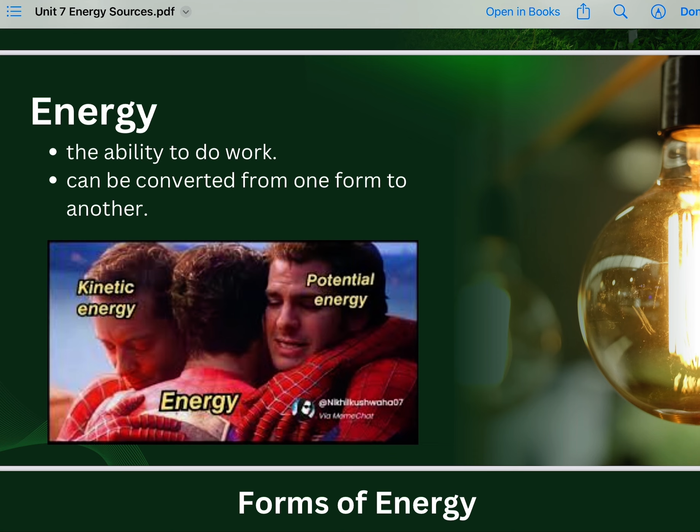That means kinetic energy, potential energy, as well as chemical energy are all just different forms of energy, including electrical energy.

So we have a lot of different forms of energy, and as I said earlier, energy can be transformed into another form.

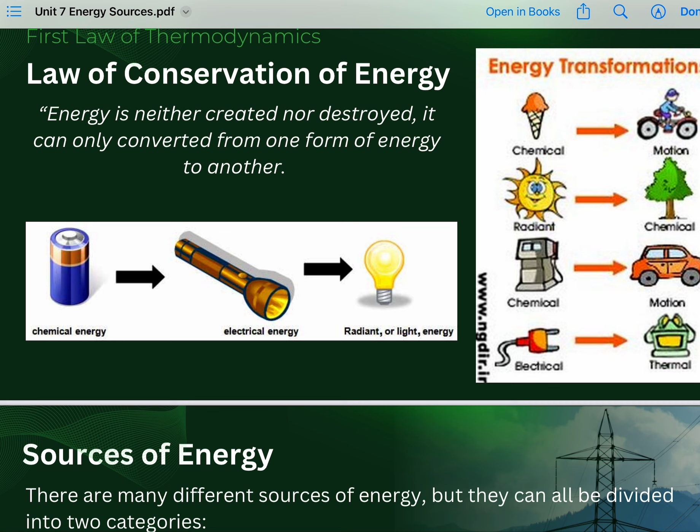So let's proceed with the sources of energy. There are many different sources of energy, but they can all be divided into two categories: renewable energy and non-renewable energy sources.

Primary energy sources take many forms, including nuclear energy, fossil energy such as oil, coal, and natural gas, and renewable sources like wind, solar, geothermal, and hydropower.

So primary sources of energy are being converted into electricity, a secondary energy source which flows through power lines and other transmission infrastructure to your home and businesses.

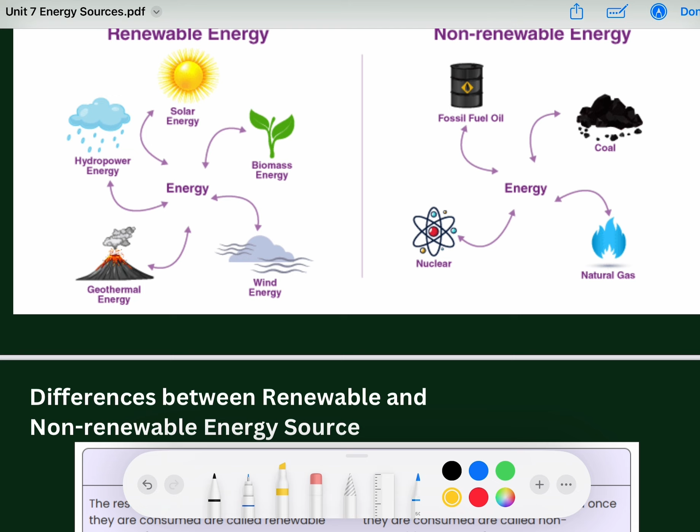Unlike solar energy, so long as andyan yung sun at may solar panel ka, continuous yung supply mo. Unlimited siya. Same thing with wind energy, dahil parating namang may hangin, parating magkaka-movement yung windmill, so parating mayroong wind energy. Same thing with geothermal energy, since hindi naman nawawala yung magma sa ilalim ng lupa, parating may source of geothermal energy. So, yun yung mga halimbawa natin ng renewable energy sources.

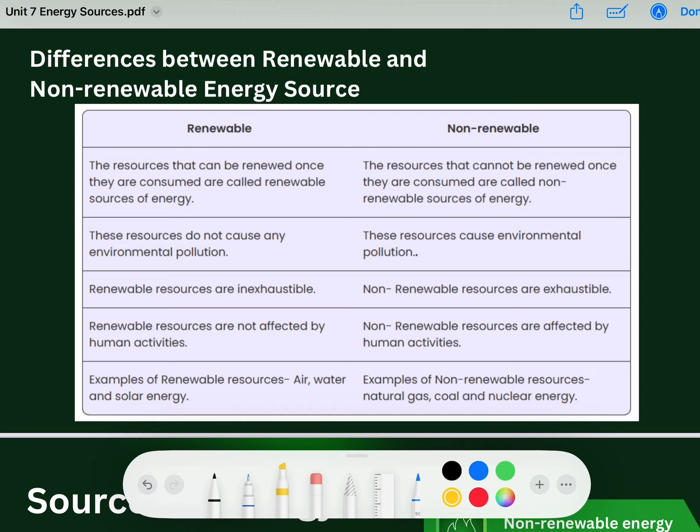So, just take note of these differences, yung description, kung ano yung pinagkaiba ng renewable and non-renewable energy sources. So let us proceed now, isa-isahin natin kung ano yung iba't ibang sources of energy na meron tayo globally.

So, energy comes from a variety of sources, both natural and human-made, and can be classified into renewable and non-renewable sources. Each source plays a significant role in meeting the energy needs of the world. Below are the primary types: non-renewable energy source, renewable energy source, at other emerging energy sources. Kasi with the technology that we are having now, class, marami nang nag-emerge na energy sources.

However, we cannot really categorize it yet as non-renewable or renewable. Kasi, yung idea ng hydrogen, it is somewhat a renewable energy source, however sobrang haba ng proseso para siya ay maging renewable. So there could be some instances na non-renewable siya. Pero yun, hindi siya classified into these two, kaya siya tinawag or nilagay as other emerging energy source, lalong-lalo na recent lang siya.

So umpisahan natin yung non-renewable energy sources. These sources are finite, ibig sabihin may katapusan lang yung sources natin nito, and will eventually be depleted. They have been formed over millions of years and cannot be replenished on a human time scale.

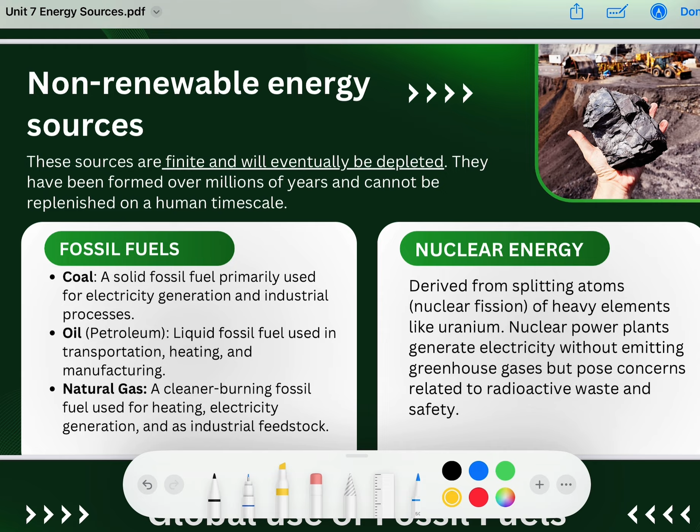Unang-una ang fossil fuels, under ng fossil fuels yung coal, oil, and natural gas. If you are familiar with how the continents were formed, kung babalikan natin yung concept ng continental drift theory, though it's just a theory, yun ay na-discover or nag-emerge millions of years ago. So yung presence ng coal, oil, and natural gas ay hindi pwedeng mabuo in a decade or in a century. It requires millions or thousands of years para magkaroon ulit ng coal sa mga lupa natin.

And these are harvested underground, ito yung isa sa mga minimina. This is because yung pagkakaroon ng coal, halimbawa na lang, happens kapag nagkakaroon din ng layering sa lupa natin or sa rocks. So, and again, hindi siya pwedeng mangyari lang sa loob ng 10-year span o kaya naman 100 years. Kailangan sobrang tagal niya para magkaroon tayo nitong mga fossil fuels natin.

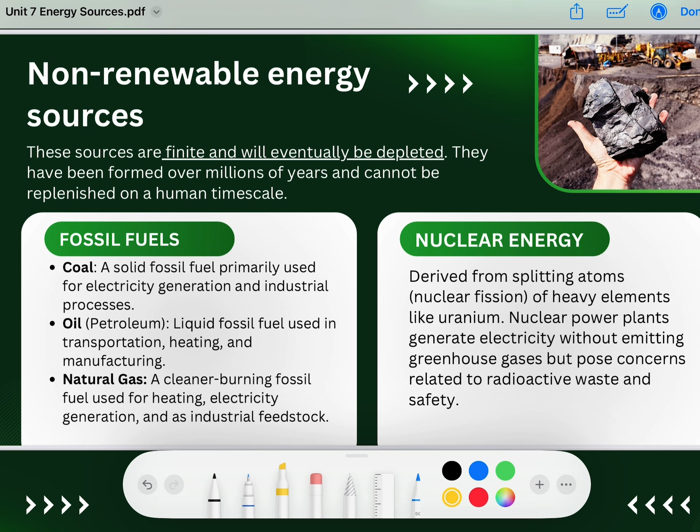So next, isa-isahin muna natin yung coal, oil, and natural gas. Yung coal, isa sa primary used sa electricity generation at ginagamit siya sa industrial processes. Next ang oil or petroleum, these are liquid fossil fuel used in transportation, heating, and manufacturing, nakukuha din ito underground. And natural gas, a cleaner burning fossil fuel used for heating, electricity generation, and as industrial feedstock.

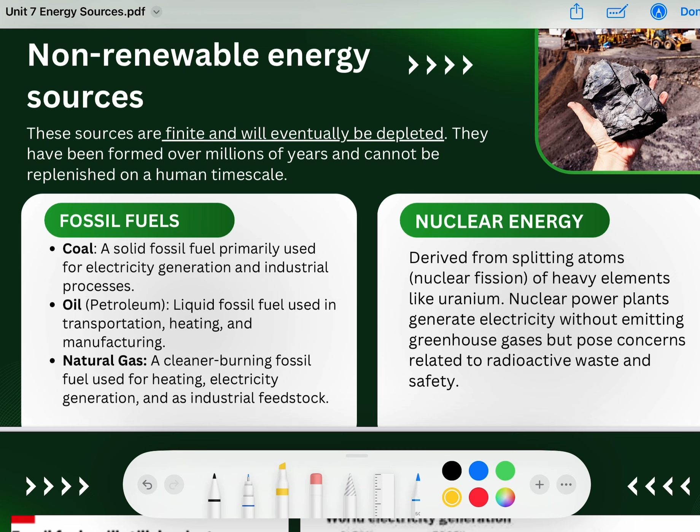Next is nuclear energy, ito naman ay nakukuha due to nuclear fission, by the splitting of atoms of heavy elements like uranium. Maganda itong energy source, however delikado lang siya kasi mayroong radiation na byproduct which can be harmful sa mga nakatira sa paligid. At the same time, delikado siya dahil may potential siya na mag-cause ng explosion, kasi may chemical reaction. Though meron naman chemical reaction sa ibang ways of harvesting energy, pero ito yung pinaka-main process of harvesting energy is chemical reaction. Kaya hindi na siya advisable, or kung walang proper maintenance, proper plan for building a nuclear power plant, hindi na talaga siya pinapayagan.

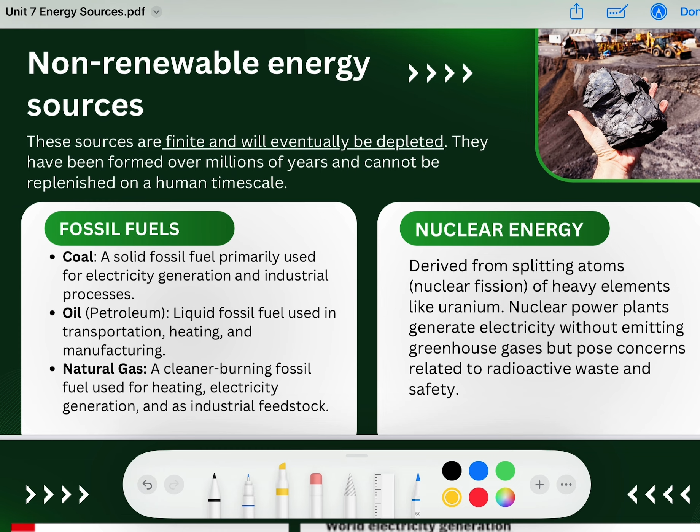Next, punta na tayo sa global use of fossil fuels. Yung fossil fuels actually ay main source natin of energy. As you can see, out of the different types of fossil fuels, yung petroleum products yung pinakamataas nating consumption, followed by coal and natural gas. Konting-konti lang yung renewables and nuclear. Imagine yung renewables natin dito ay 14.1% lamang, pero yung renewable energy sources natin, parati namang andyan.

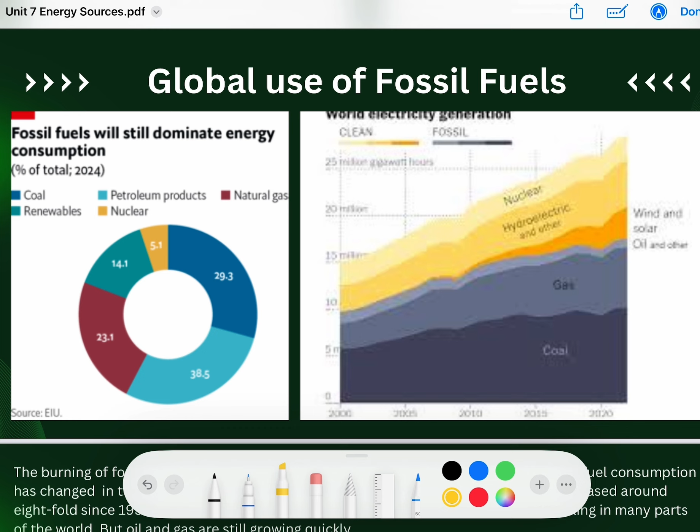So later, pag-uusapan natin bakit ba hindi tayo nag-shift into renewables, what hinders the industry to shift into renewable energy and patuloy na harvest ng energy through non-renewable. At yung world electricity generation naman ay highly dependent on gas and coal. Kung makikita ninyo, itong nasa lower part na ito.

At ang hydroelectric lang bilang renewable energy source ay konting porsyento lang. Mas madami pa rin yung fossil fuels compared sa renewable or sa clean energy harvesting.

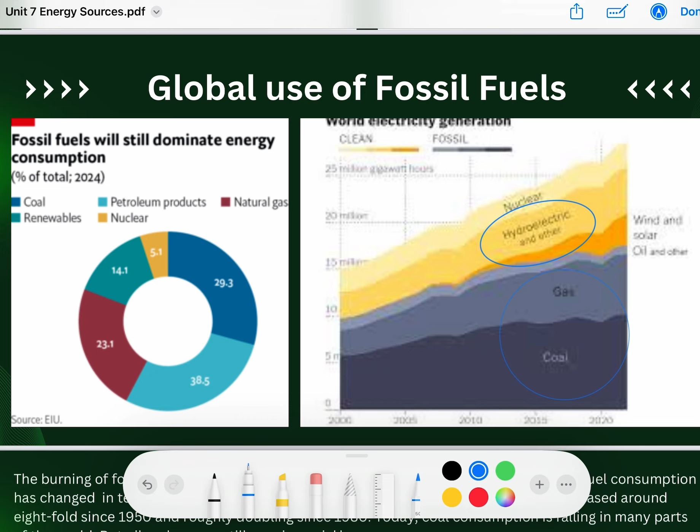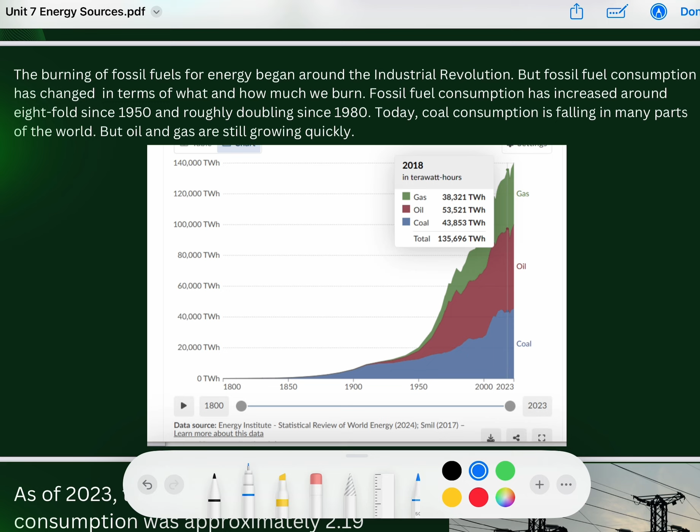Another graph shows the burning of fossil fuels for energy began around the Industrial Revolution. Take note of that. Yung fossil fuels kasi, sobrang laki ng part niya when it comes to transportation, infrastructure. That is why nung nagkaroon ng Industrial Revolution, naging mataas din yung demand for gas, oil, and coal.

Kasi nga, sila yung tatlo sa mga pinakagamit na energy during the Industrial Revolution. But fossil fuels consumption has changed in terms of what and how much we burn. So fossil fuel consumption has increased around 8-fold since 1950 and roughly doubling since 1980. Ano na lang kaya yung fossil fuel consumption natin at presently, lalong-lalo na mas madami na yung demand for transportation, infrastructure, and industry.

Kumbaga hindi man natin totally, kasi yung fossil fuel consumption, it includes burning. At kapag merong burning o merong combustion, merong carbon dioxide na napoproduce. Kaya siya harmful sa ating environment. So regardless of that need, wala kasing proper regulation on the use of fossil fuels, kaya nagiging harmful siya.

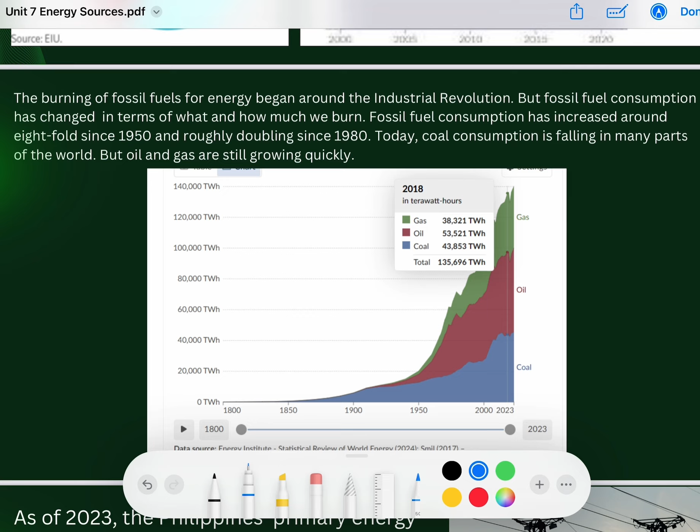Pero kailangan naman talaga natin yung paggamit ng fossil fuel, lalong-lalo na yun yung madaling paraan ng pag-harvest ng energy compared sa mga renewable energy sources. Pag-uusapan pa natin yan later sa mga susunod nating slides.

So punta naman tayo sa context ng energy consumption sa Philippines. As of 2023, the Philippines' primary energy consumption was approximately 2.19 exajoules with fossil fuels, mainly oil and coal, constituting a significant portion. Oil consumption was about 0.93 exajoules and coal consumption was around 0.88 exajoules in terms of electricity generation.

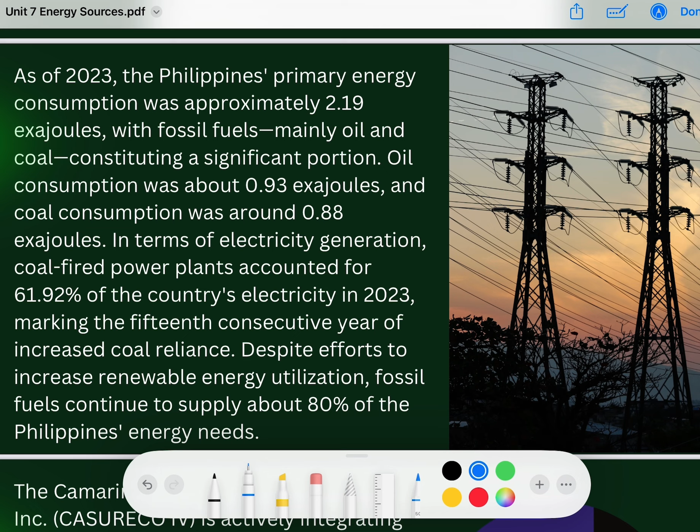Coal-fired power plants accounted for 61.92% of the country's electricity in 2023, marking the 15th consecutive year of increased coal reliance. Despite efforts to increase renewable energy utilization, fossil fuels continue to supply about 80% of the Philippines' energy needs.

So dito, yung CASURECO IV, this is somewhere in Partido area. Camarines Sur 4 Electric Cooperative Incorporated, or CASURECO IV, is actively integrating renewable energy sources into its power supply. The cooperative has entered into renewable energy supply agreements, particularly focusing on hydroelectric power to diversify its energy mix by harnessing renewable energy sources like hydro and solar power.

CASURECO IV aims to decrease its reliance on fossil fuels, thereby enhancing energy security and contributing to environmental sustainability. So bago ko i-discuss class yung renewable energy sources, pag-usapan na natin bakit hindi tayo nag-shift globally sa renewable energy and tinatangkilik pa rin natin yung non-renewable energy harvesting.

Yung non-renewable energy harvesting kasi class ay mas madali at mas mura. Mas madali yung pag-harvest ng energy, at the same time mas mura siya compared kung mag-shift tayo into renewable energy source o renewable energy harvesting. Ang daming proseso, ang daming kailangang gawin.

Para lang magsimula ang solar power plant, hydrothermal power plant, o geothermal power plant. At siguro kung i-compare natin yung nakukuha nating energy, mas madami yung convert na electrical energy ng mga non-renewable compared sa renewable. So kumbaga, since ito yung mas madali, dun tayo. Parang ganun yung naging mindset.

Also, if naisip ko lang, since yung Pilipinas ay isang archipelago na mapalibutan tayo ng tubig, pwede din tayong mag-shift sa... balikan natin lang yung forms of energy. Wave energy, yung pag-harvest ng energy through waves. So, since ang Pilipinas ay isang archipelago na palibutan tayo ng tubig, if sana yung na-maximize natin yung mga natural resources natin, then we can definitely shift into renewable energy.

However, class, talagang magastos, madaming prosesong kailangan pagdaanan para lang makasimula ng mga ganitong renewable power plants. So, isa-isahin na natin class yung mga renewable energy sources na meron tayo or discovered na renewable energy sources na pwede nating gawin.

So first, we have the solar energy, which is definitely coming from the sunlight. This is through harnessing energy using photovoltaic or PV panels or solar thermal collectors. Next is wind energy, generated using wind turbines. Hydropower, generated by the movement of water through dams or rivers.

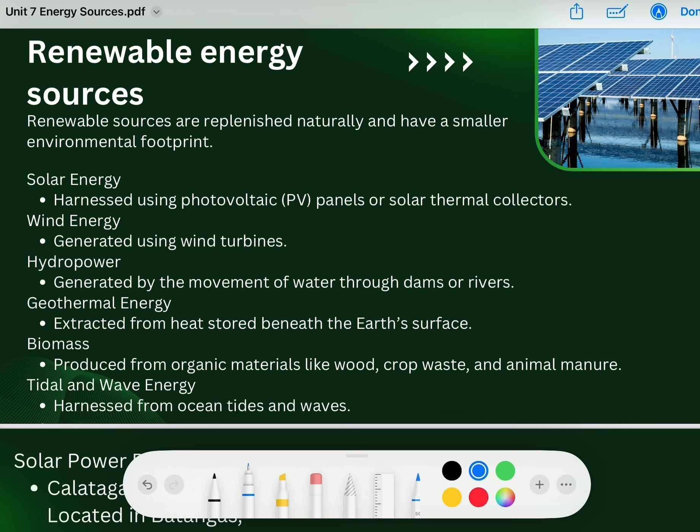Geothermal energy, extracted from heat stored beneath the Earth's surface. Biomass, produced from organic materials like wood, crop waste, and animal manure. And tidal and wave energy, harnessed from ocean, tides, and waves.

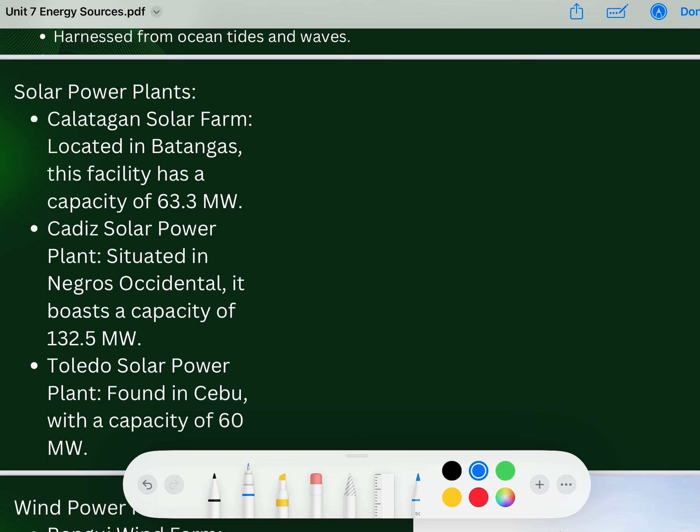So, meron ako dito class pictures nung mga nakuha kong solar power plants na meron tayo sa Pilipinas. However, hindi sila nag-load, so I will just send the link, yung reference ko nito, kung saan or ano yung itsura ng mga solar power plants dito sa Pilipinas. So, meron tayo sa Calatagan, Batangas, Negros Occidental, and Cebu, Toledo, Cebu.

Dito sa Bicol, meron tayo sa under Casureco sa Calabanga, Camarines Sur, na I think kakatayo lang last year. Natapos lang yung pagtayo sa kanya last year, pero hindi ko alam kung operating na siya. So meron doong solar power plant na tinayo to aid the Casureco in providing electricity, I think, for residential use siya. So, magandang initiative na yun.

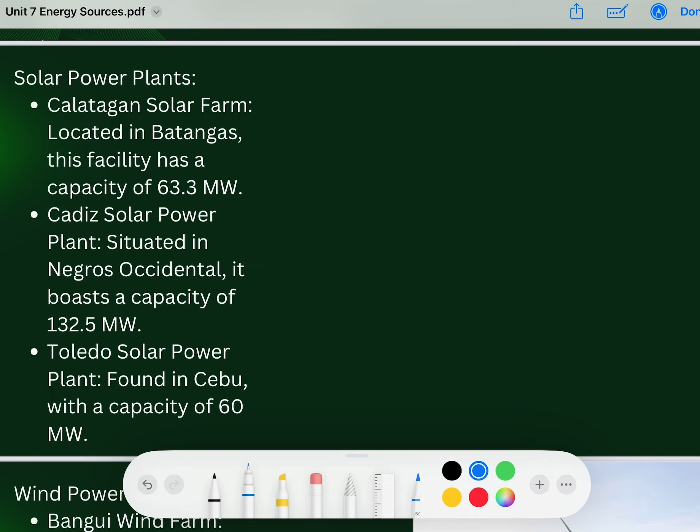Also, wind power plant. So, alam naman natin, Ilocos Norte, yung pinaka kilalang mga wind power plants. Halos lahat, Ilocos Norte. Iba-iba lang yung mga wind farm na to. Meron tayong Bangui Wind Farm, Burgos Wind Farm, and Caparispisan Wind Farm, all situated in Ilocos Norte.

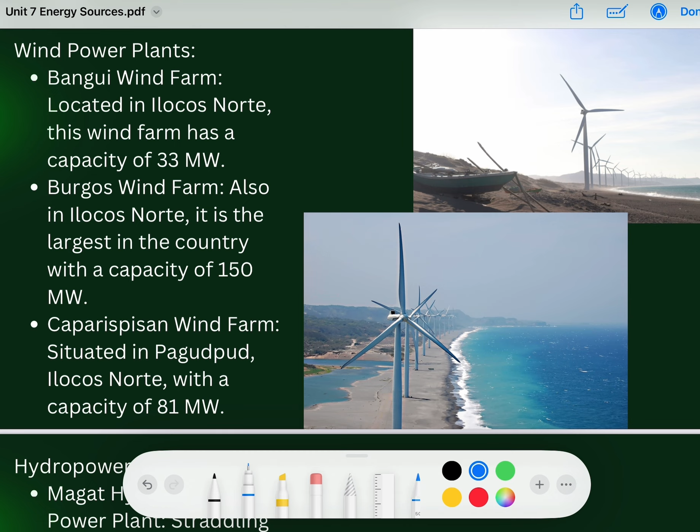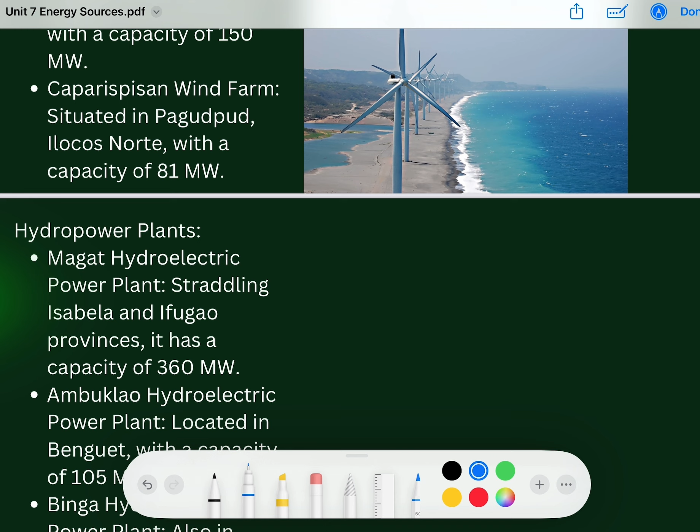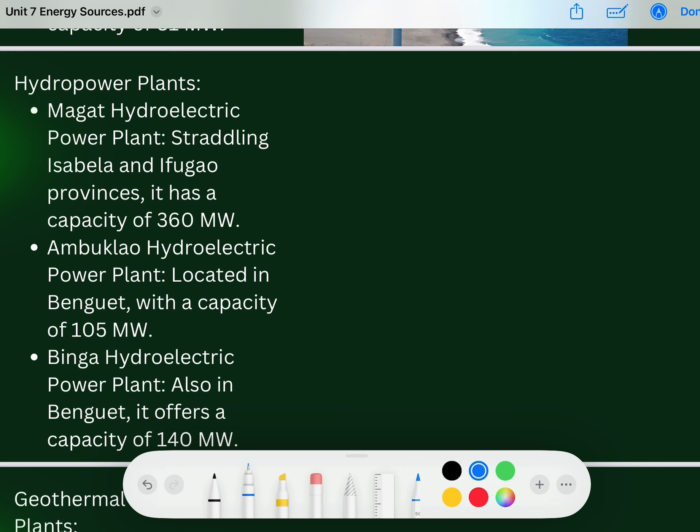Next is hydropower plants. We have one in Ifugao and Isabela provinces, the Magat Hydroelectric Power Plant, Benguet, Ambuklao Hydroelectric Power Plant, and also in Benguet, the Binga Hydroelectric Power Plant.

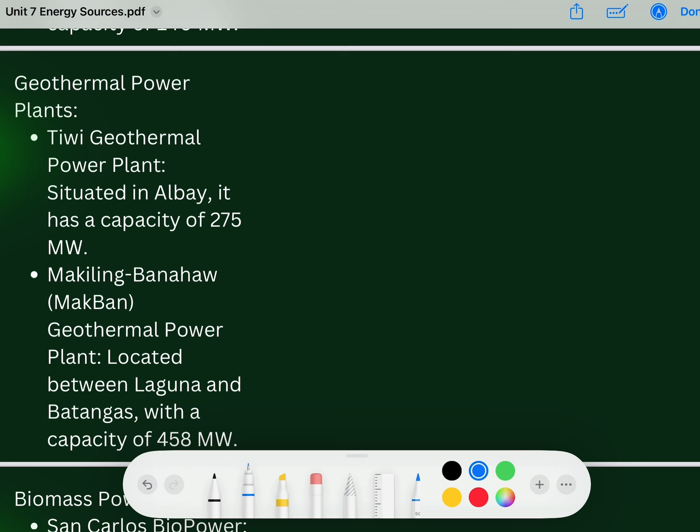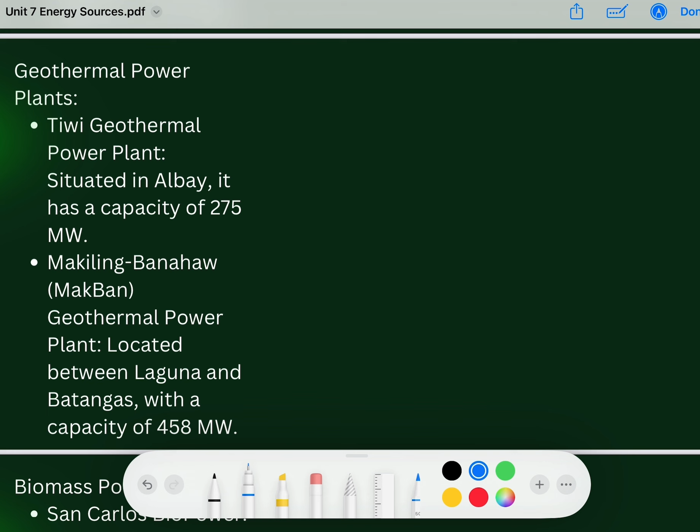Next is the geothermal power plants. Meron tayo sa Tiwi, Albay, the Tiwi Geothermal Power Plant, and in Laguna and Batangas, the Makiling Banahaw Power Plant. So, as you can see, yung Tiwi, of course, definitely malapit ito sa Mayon, yung power plant na to. And yung Mount Banahaw and Makiling, the MakBan Geothermal Power Plant. Located din siya sa mga bundok.

So, next, the biomass power plants. Yung biomass power plants pala, class, gumagamit siya ng organic material, such as yung mga dumi ng hayop, yung mga food waste. Yun yung ginagamit sa biomass power plants. Ginagamit nila yung organic matter to produce electricity.

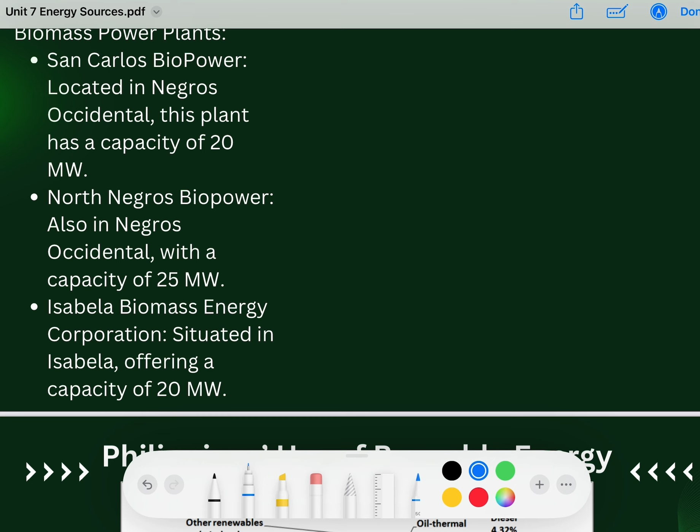Meron tayo sa Negros Occidental, the San Carlos Biopower. Pero kung makikita ninyo, sobrang liit ng na-generate niyang electricity, 20 to 25 megawatts lamang. I think this is just enough to power an establishment, but I don't think it can, or enough siya to power an entire community, a residential area. So, we have 2 in Negros Occidental and 1 in Isabela.

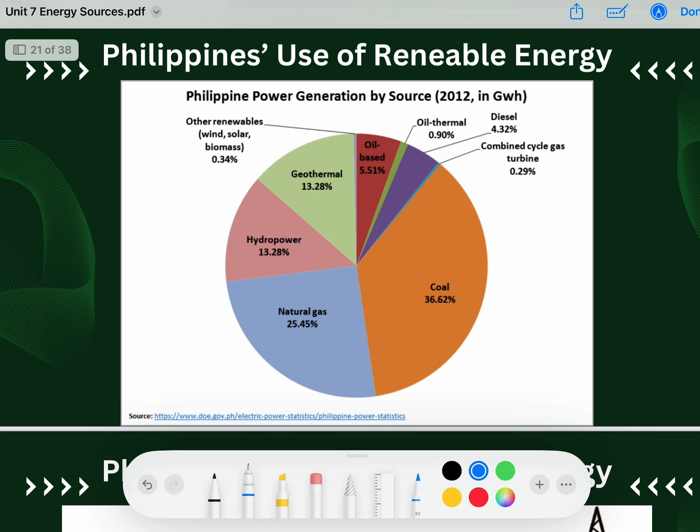So, this is the energy usage of the Philippines in general, not just renewable energy. What is the percentage of our energy sources or consumption? Coal is the largest energy source at 36.62%, followed by natural gas at 25.45%. If you analyze this pie chart, almost two-thirds is non-renewable, and only one-third, such as geothermal, hydropower, and other renewables, is renewable energy source. So we are still highly dependent on non-renewable energy despite having huge potential for renewable energy since we have a lot of natural resources; we still haven't maximized it.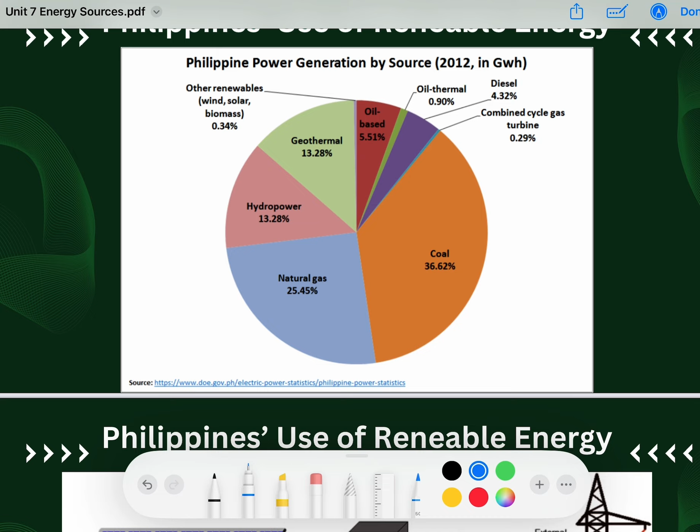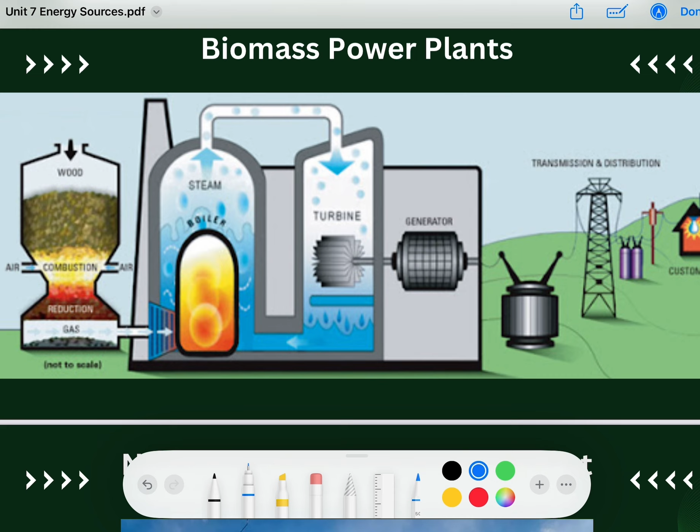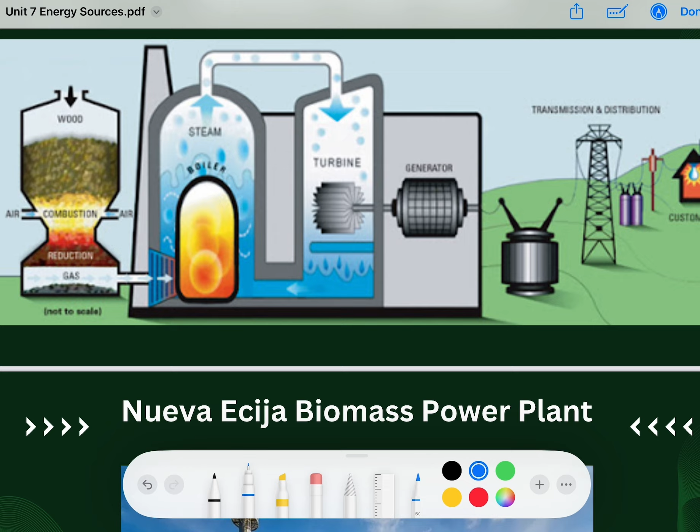So let's go to the third topic, emerging and alternative energy sources. This focuses on clean energy. We have hydrogen energy, used as a clean fuel when extracted via electrolysis using renewable energy. This is the method of producing hydrogen gas, which can be done through biomass, even electrolysis. So it can produce hydrogen gas which can be a clean fuel.

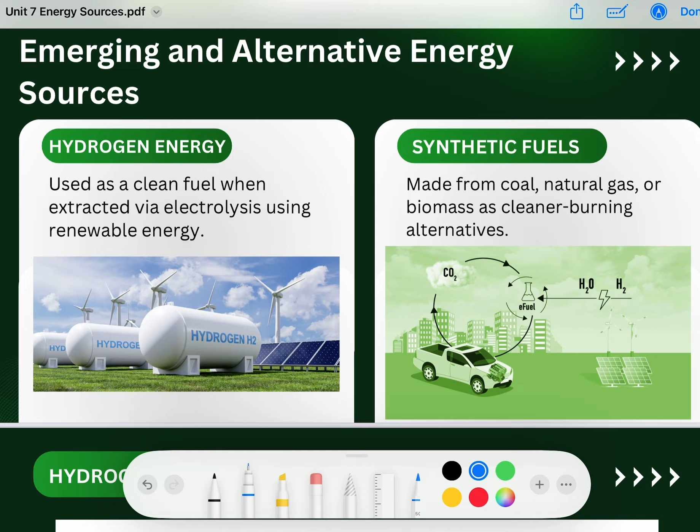Also, synthetic fuels. These are made from coal, natural gas, or biomass, but no combustion takes place. This is also electrolysis. Instead of burning natural gas or coal, which produces carbon dioxide harmful to our environment, we do electrolysis instead so there's no byproduct of carbon dioxide. So, still, it's clean energy. That's hydrogen energy.

So what are the benefits of renewable energy sources? Of course, many. First, environmental benefits. Greenhouse gas emissions will be reduced. Toxic gases in our atmosphere will be reduced. Air pollution will also be reduced since there will be fewer pollutants destroying our air quality. And it can preserve ecosystems since it will be a healthier option for our environment.

Next is economic advantages. Since there are many processes in creating or harvesting renewable energy, it will produce jobs. It can provide jobs for people for installation, maintenance, manufacturing, or research. Also, cost savings. The investment is really large; however, if the quality is good and it is well-maintained and assured to be long-term in use, you can still save money. You just really need to invest a lot upfront.

Next is localized energy production. Decentralized systems reduce transmission losses and bring energy to remote areas, fostering regional development. For example, those in coastal areas or isolated islands won't suffer from having no power lines or electricity. If there's a solar power plant in the area, or a wave or tidal energy power plant, they will still have access to electricity.

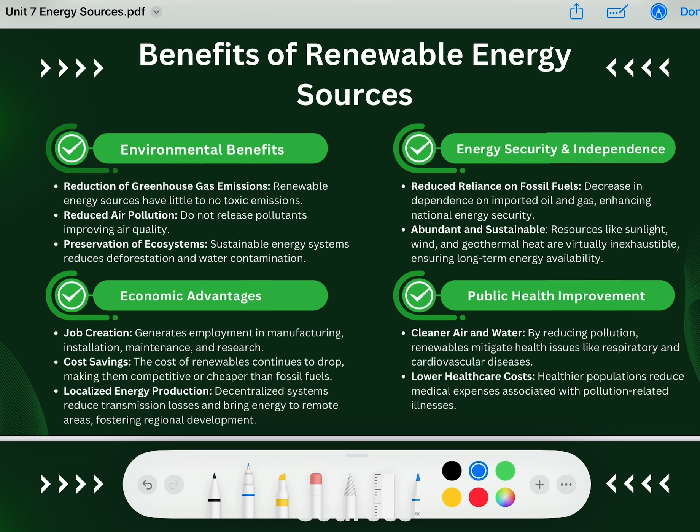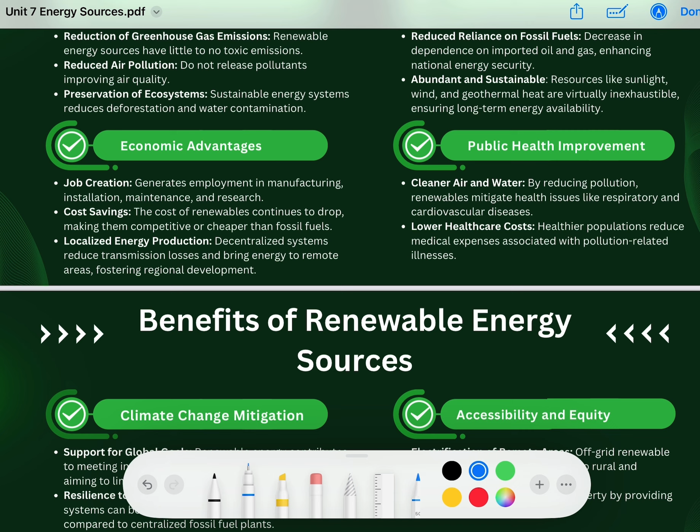Also, energy security and independence. We will reduce our reliance on fossil fuels which have limitations. This is abundant and sustainable since it's renewable. Also, public health improvement - there will be cleaner air and water, as well as reduced risk of diseases or illnesses, because our environment becomes healthier when we shift into renewable energy sources.

Also, it can help mitigate climate change because renewable energy supports global goals. If you remember the Sustainable Development Goals, that falls under the SDG about renewable energy and climate action. Also, we will have accessibility and equity since energy will become available for all - not just in areas where power poles and lines can be installed, but also isolated coastal areas will have access to electricity.

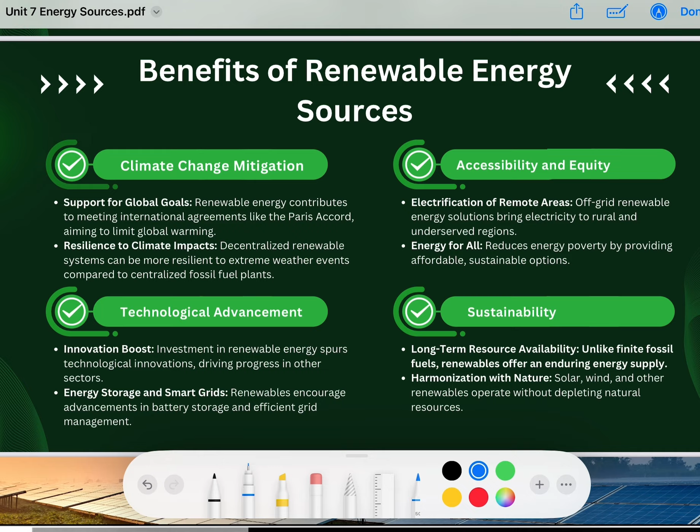Sustainability, of course, again, this is long-term. And technological advancement - we will have the drive to innovate and discover more about how we can make these equipment more durable or more efficient to use. So it directs us toward technological advancement as well. Our universe is a sea of energy - free, clean energy. It is all out there waiting for us to set sail upon it. This is very true for the Philippines. As I said earlier, the Philippines is very fit for renewable energy harvesting or harnessing.

Kasi nga, tayo ay isang archipelago, so napapalibutan tayo ng tubig. Tayo ay nasa equator, so we receive a high concentration of sunlight. And tayo ay nasa Pacific Ring of Fire, marami tayong geothermal sites sana.

However, hindi natin siya na-maximize sa hindi ko malaman na dahilan. So we hope that still, since we are facing a lot of concerns in our environment, sana ay makapag-isip na ng paraan, or makapag-shift tayo into renewable para at least ma-lessen, ma-mitigate natin yung climate change. And of course, ma-maximize natin yung resources na meron tayo.

Kaya na lang tayo pinag-aagawan, kaya na lang tayo inaagawan ng teritoryo, kasi nakikita nila yung potential ng Pilipinas na hindi man lang natin ma-maximize.

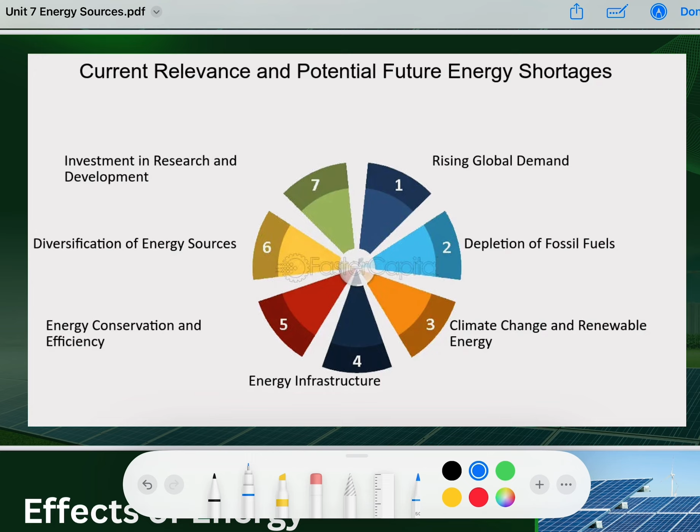Effects of energy crisis. Siguro hindi naman, or kahit hindi natin talaga isa-isahin, I believe you are aware of the possible scenarios na pwedeng mangyari sa atin kapag naka-experience tayo ng energy crisis. Because, of course, highly reliant na tayo sa energy.

Halimbawa na lamang sa simpleng pag-update natin sa ating mga magulang kung nasaan tayo, kailangan natin ng energy, 'di ba? Chemical energy ng ating cellphone. So if walang energy, then definitely we will not have power to, or energy to power our cellphones. Sa pagluluto, sa transportation, kailangan natin yung energy.

So there is an alarming effect kapag nagkaroon tayo, or an alarming state kapag nagkaroon tayo ng energy crisis. So there has to be a mitigation or mitigating actions that requires proactive policies, technological innovation, and international cooperation.

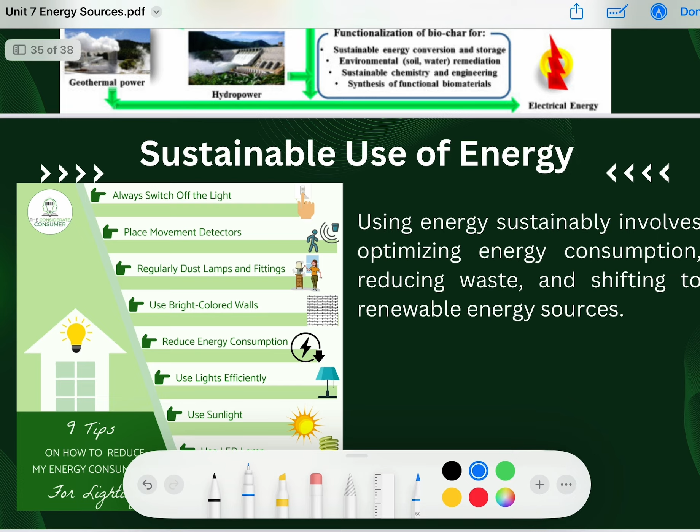Ano ba to? Nagka-shuffle ata eh. So ito na lang, sustainable use of energy. Iba naman, so let me just discuss this briefly.

9 tips on how to reduce my energy consumption for lighting. Dito ay sa paggamit lang ng ilaw, okay? So of course, always switch off the light when not in use. Place movement detectors para magkakaroon lang ng light kapag merong motion. Regularly dust lamps and fittings, that is very important. Use bright colored walls para mas ma-enhance yung reflection ng ilaw.

Reduce energy consumption. Use lights efficiently. Use sunlight, use natural light. Use LED lamp kasi mas efficient siya. And use light sensors. So we hope that by simply sa simpleng paggamit lang natin ng ilaw or ng mga appliances, we practice efficient consumption.

Na gumagamit tayo ng energy kasi hindi naman natin maaalis yung pangangailangan natin ng electricity or ng energy, pero sana ay maging sustainable and maging efficient yung paggamit natin. Kasi again, yung crisis, yung environmental challenges na meron tayo, ay hindi naman na natin yan maaalis. What can we do is to lessen the effect that it can bring to our environment.

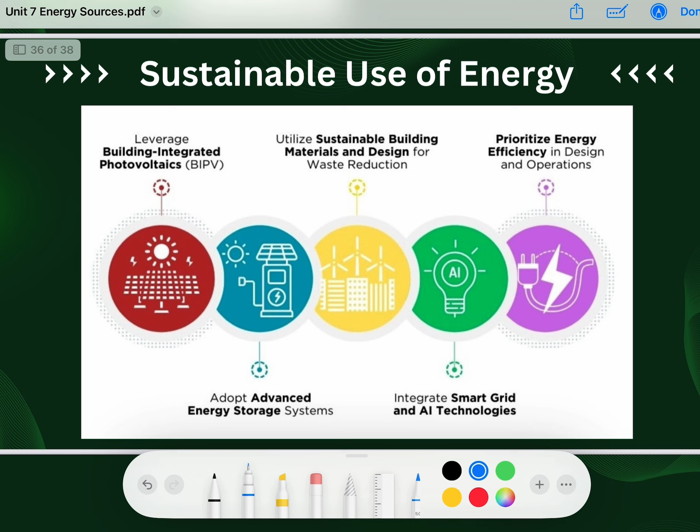And that can be done, mababawasan lang naman natin yun, if we will practice sustainable use of energy or if we will practice its efficient use. So sana even in your industry, kindly practice efficient and sustainable use of energy. Kasi, again, tayo lang din naman yung makakaranas ng epekto nito in the long run.